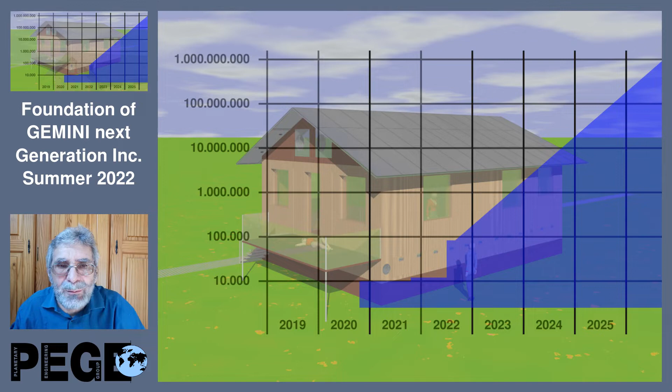Our central product is an affordable dream for man. One family, one house, one solar power plant, one storage power plant. This is our product. And our battle cry on the market will be: home ownership cheaper than rental apartment. Why? Because rent, operating costs, electricity and fuel for the car are more expensive than the loan installment for the house, minus the revenues of the electricity sales.

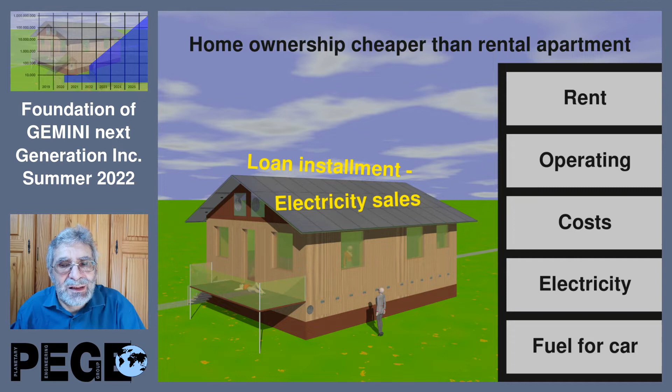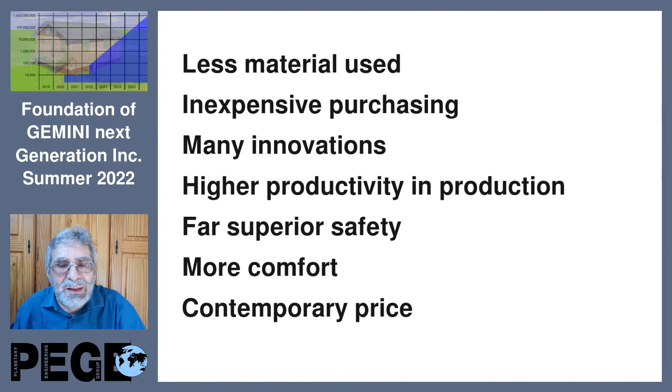How should this be possible? Because, first, less material used. Second, inexpensive purchasing. Third, many innovations. Fourth, higher productivity in production. Fifth, far superior safety. Sixth, more comfort. And seventh, contemporary price.

Let's look first at the foundation of an 80 square meter ground house. Here we have first a cheap house, no cellar, only the foundation. This foundation means to take out 64 cubic meters of earth and remove all this material. Then to put 95 tons of gravel into it, then above the gravel 32 tons of concrete. The access road to this house has to be suitable for heavy trucks. This is a cheaper solution for most house builders.

No cellar, we make only the foundation. Now, how to save material? We use only 16 screws, and each screw is only 12 kilo, so our total material is 192 kilo, compared to nearly above 100 tons. This is how to save material. We have other examples, but this is the main one.

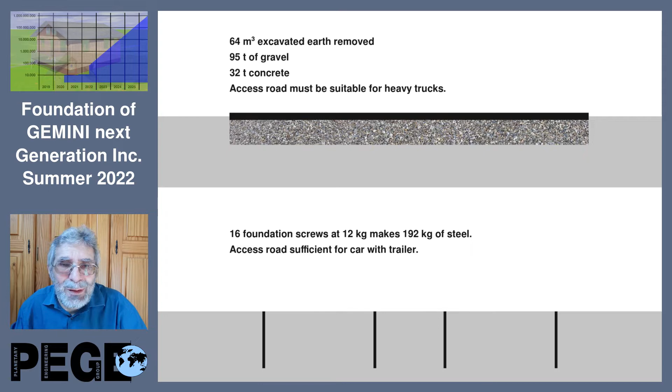Next, inexpensive purchases. Ventilation system with heat recovery and moisture recovery from exhaust air. In Germany, a unit like this would easily be about 4,000 euros. We have a big unit with 20 centimeter pipes, so extreme low noise, very high efficiency, and when we take a 40 foot container full of it, we have a price of a little bit above 500 euros until we have this in Europe. There are house companies offering far worse equipment for an additional price of 11,700 euros. At our house, this is included.

What would you say? You go in the car configurator for a good car and suddenly you see electric window up and down in front, additional price, oh. Electric window up and down for the rear, additional price, oh, you would be shocked. This is in all new cars. Why should I pay additional price for electric windows? Impossible. So this is for sure included in the standard price of our house.

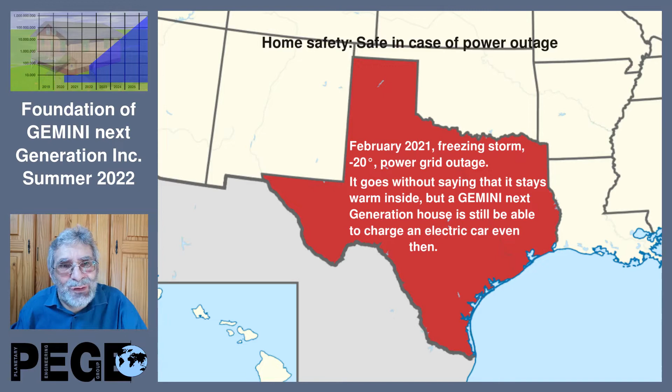This house would give you just normal room temperature. You would not notice that there is a power outage. You look out of the window and see no light at the neighbors. Something is wrong. And you will even be able to charge your electric car during this power outage. That's security.

Next, comfort. We will have floor heating and wall heating combined. For example, a toddler plays on the ground, and if you cool the ground, it would not be very healthy. But in this case we can do the following: we cool down the wall to 19 degrees Celsius and heat the floor to 25 degrees Celsius to be comfortable for the crawling toddler on the floor. That's not only comfort, that's also very energy efficient heating.

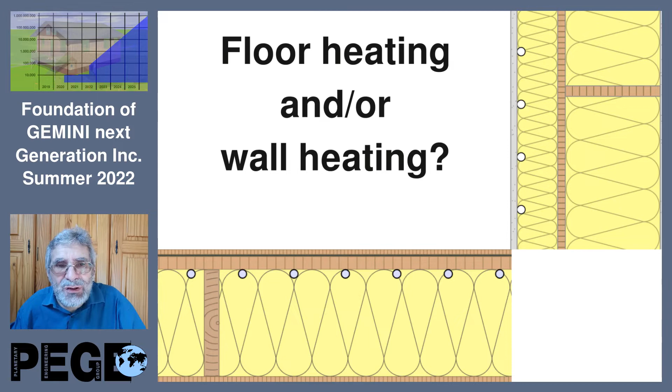Next, standard connections of the house. A house with standard connections? Yes, this is something new. Here, for example, we have a garage door. This garage door is very well insulated. Why should a garage door be well insulated? Because behind it is a heated garage, not 20 degrees, only 12 to 14 degrees Celsius.

And then floor heating in this garage. Why? It's a big advantage for electric cars. The car and the battery are in the morning heated up to 12 to 14 degrees Celsius. You have the same range as when it's autumn or spring, and it's a big comfort win.

And the house has standard connections to connect a garage with floor heating, and also the sidewalks and the driveway have floor heating to be ice-free and snow-free, and also we have a connection for the swimming pool to heat it. All is included in the house, all these connections.

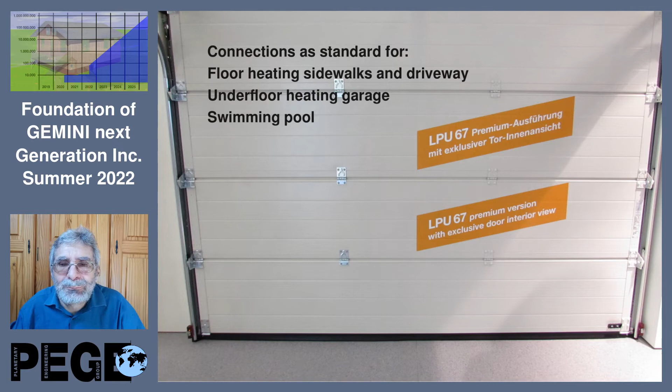About all this I made another video, disruption at houses, about all these innovations we put in the house.

Next, what is a fair price?

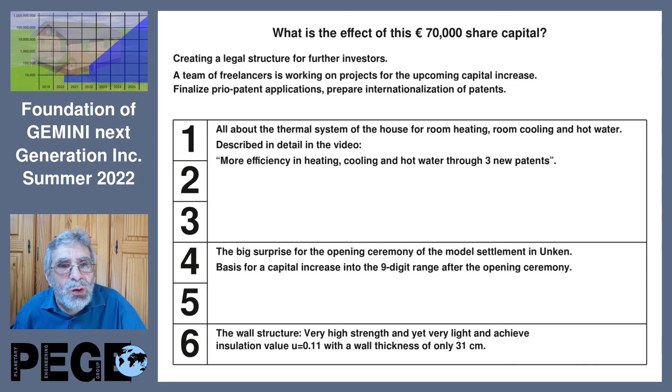What will later go on? Dynamic of goals and decisions, another video gives the answer.

There are also the 3 market phases of the house. And the 3rd market phase means climate protection superiority house is worldwide standard in construction, and we hope to hold at this time a good market share on the world market of houses.

These are our goals, very big.